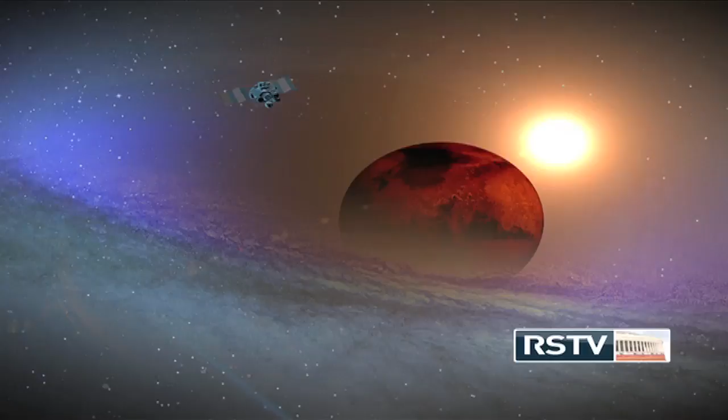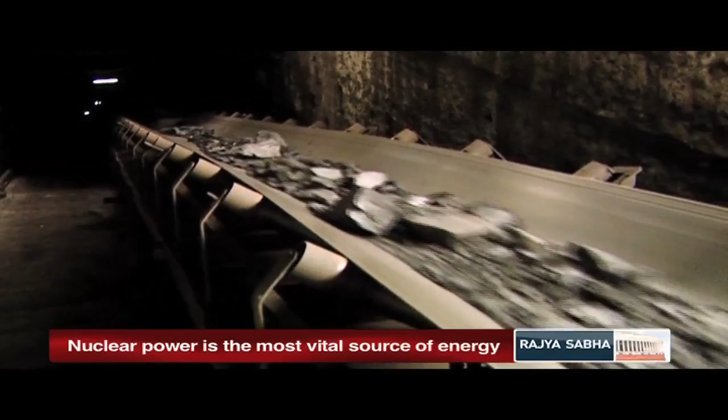In today's world, electricity is considered to be the life and blood of a nation's economy. Growing demand for energy resources is a crucial issue worldwide today, especially in developing nations like India. India is known to have a heterogeneous mix of energy resources that include both non-renewable resources like coal, petroleum and gas, and renewable resources like solar, wind and hydroelectric power.

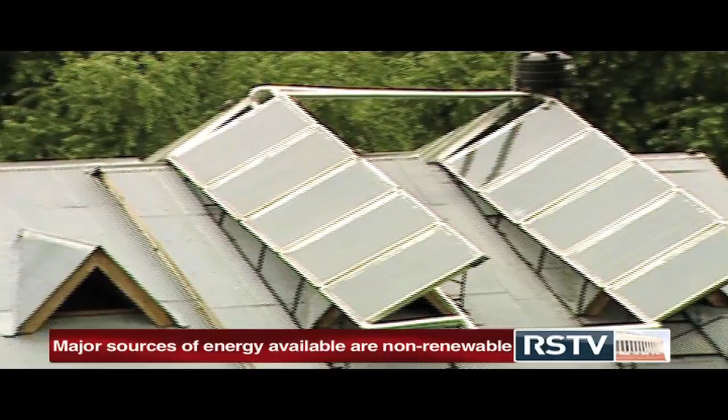Current studies suggest that we presently use an optimal mix of all the available energy resources to barely meet our needs. In the coming years, the energy requirement of India is expected to reach about 800 gigawatt by 2032 and 1300 gigawatt by 2050. It is obvious that there is an urgent need to explore novel methods of generating clean and safe energy. In this context, nuclear energy has been voted for as a highly viable option.

While coal continues to be the major electricity source in India, it is indeed a matter of great pride that about 2% of the electricity generated in India now is based on nuclear energy.

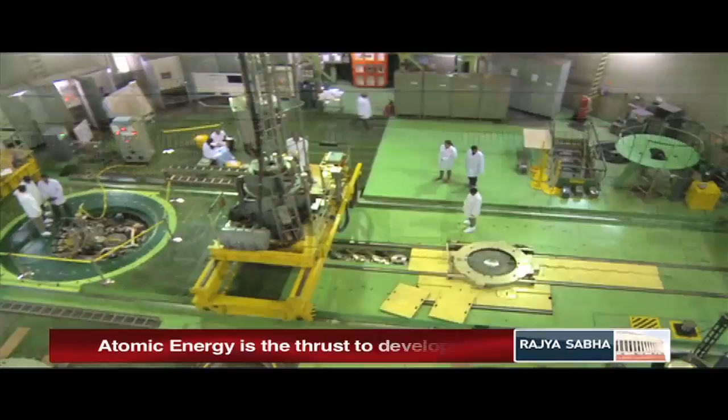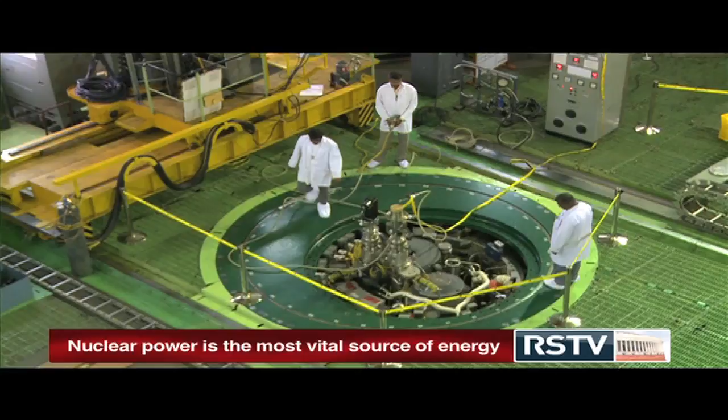India today is the owner of robust nuclear power technologies, engaging in R&D in various aspects of atomic energy and nuclear engineering, including exploration and mining of uranium, nuclear energy development and implementation, application of radioisotopes, etc. This growth has been achieved by the relentless efforts of numerous researchers under the guidance of visionary leaders.

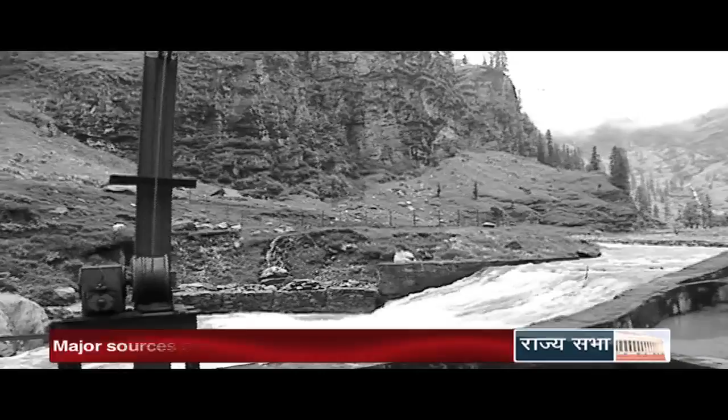The efforts to make our country self-reliant in energy production started right after the independence. While the oppressing British rule left the country in shambles, the increasing population and rising industries demanded more power. Initially, coal and hydro were considered as the primary energy sources. Fossil fuels like coal are limited and hydro capacity was bound. Hence, the country was looking for an energy resource that would ensure that we would be self-reliant in energy for centuries to come.

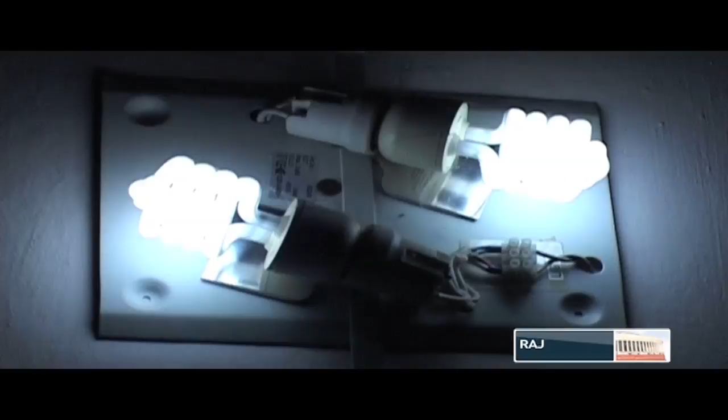60 years ago, nuclear technology was a futuristic technology. No one in the world had yet constructed or operated a commercial nuclear power plant.

Today, we have a realization in the country at all levels that nuclear energy is a very important component of the energy mix that we need for the country, because there is a pressure on fossil fuels. We know that they cannot be there for too long a time. There is a question of cost of the fossil fuel. There is a question of environmental issues connected with fossil fuel use, like carbon dioxide released to the environment, etc. So, looking at all this, the country knows that nuclear energy is very important.

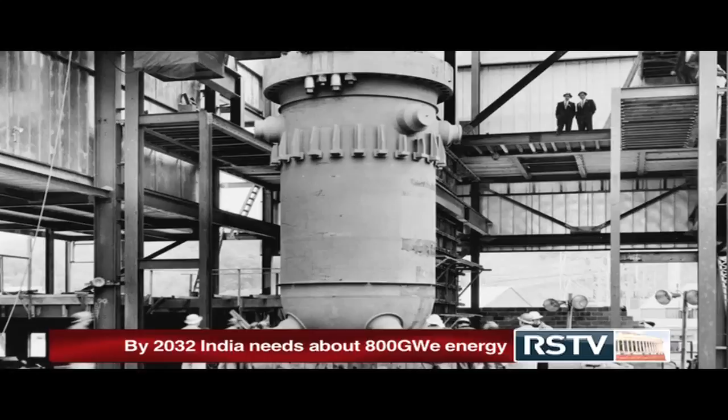The first ever commercial nuclear power plant was set up by the Soviet Union and became operational only on June 27, 1954. It produced just 5 megawatts of electric power. For a young nation eager to modernize and leap into the 21st century, nuclear power was one of the options. In this context, the setting up of the Atomic Energy Commission in 1948, followed by the establishment of the Department of Atomic Energy in 1954 to implement the policies framed by the Atomic Energy Commission, are important historical milestones.

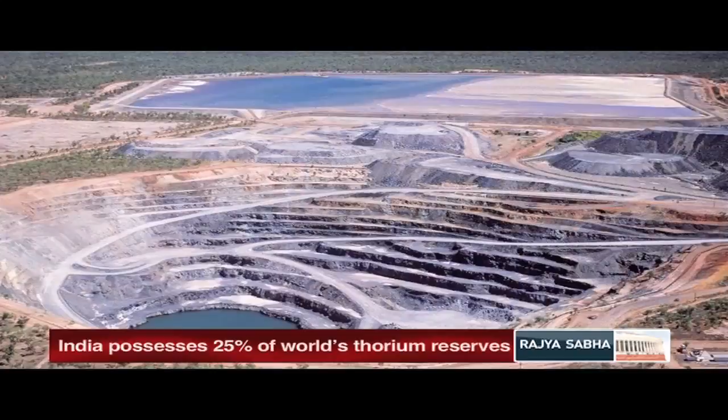While India was striving to emerge as a nuclear power nation, there was a catch. Uranium was not widely available in India. It was at this juncture that Homi Jahangir Bhabha, the first Secretary of the Department of Atomic Energy, made a visionary proposal. He saw potential where no one else saw worth. The monazite sand present in the beaches of Kerala and southern Tamil Nadu is naturally rich in the rare element thorium. India has very little uranium reserves but possesses around 25% of global thorium reserves.

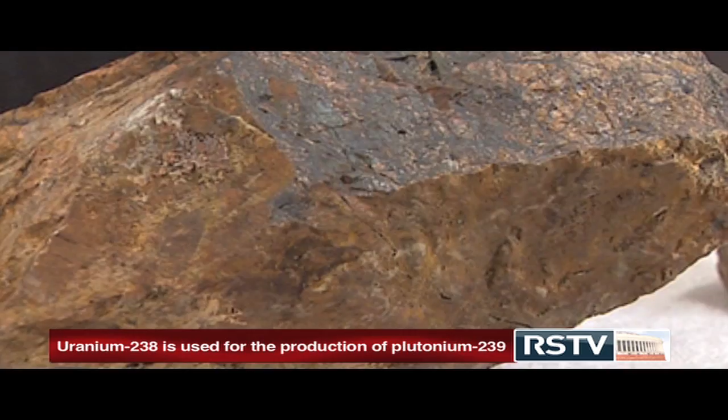Thorium in those days had no use, but Bhabha realized if only the mildly radioactive thorium could be made into a nuclear fuel, an energy source would be found ensuring energy security. Naturally occurring thorium itself is not a fissile material, but can be converted into its fissile isotope of uranium, namely uranium-233, through transmutation in a reactor fueled by other fissile materials.

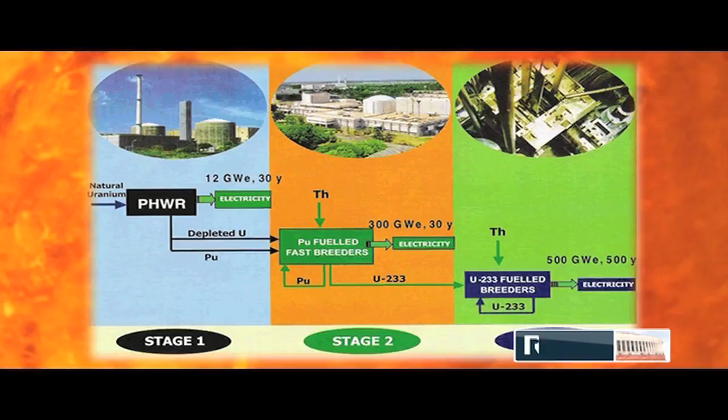Thus emerged the three-stage Indian nuclear program. This sequential three-stage program is based on a closed fuel cycle where the spent fuel of one stage is reprocessed to produce fuel for the next stage.

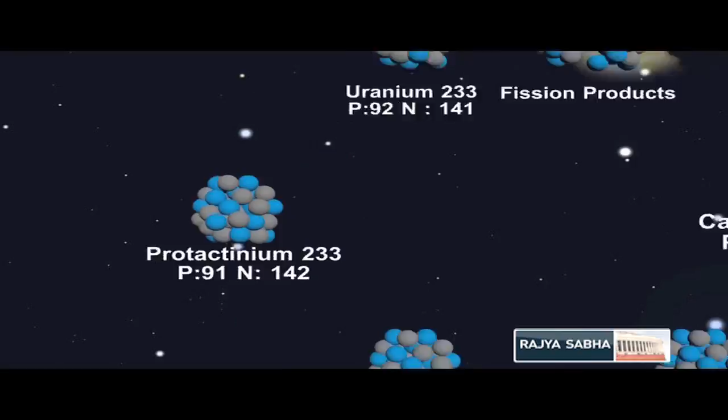Alpha particles cannot transmute thorium into U-233. Only neutrons can. We need plutonium for use in fast breeder reactors where the surplus neutrons can convert thorium to U-233. In the first stage of the Indian three-stage nuclear program, natural uranium is used as the fuel. The nuclear reactor produces plutonium as a byproduct. If we can harvest plutonium from the first stage reactors, it can be used as fuel in the second stage breeder reactors.

Plutonium produced in nuclear reactors is a mixture of various isotopes including Pu-239. It also contains Pu-240 and smaller quantities of Pu-241, Pu-242 and Pu-238. Thus, we should not give the impression that Pu-239 is being separated.

In what is called a thermal reactor, which is basically a moderated reactor, moderated with either water or heavy water, the neutrons which are released out of fission have very high energy and they are immediately slowed down by the moderator. That is required to increase the probability of fission in the next chain.

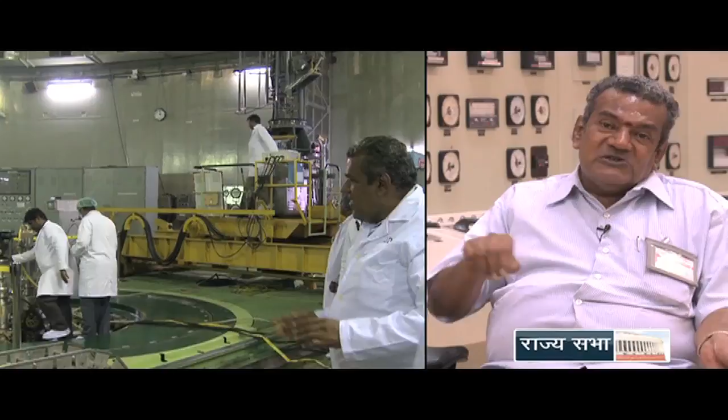Whereas, in a fast reactor, the neutrons are not moderated. The neutrons are specifically maintained with higher energy, but the probability of fission comes down. So, the reactor core will be enriched in fissile material. And the advantage of fast neutrons is that such a reactor is capable of producing more fissile material than it consumes. That is why the term fast breeder. Breeding is a process in which we generate more fuel than what we consume.

For instance, if I load 1 kilogram of fuel in a fast reactor, at the end of what is called a doubling time, the 1 kilogram of fuel would have burnt, but it would have generated 2 kilograms of fuel. The extra 1 kilogram can be used for building another reactor. So, that is called breeding.

The advantage, or I will say the necessity for breeding, is like this. Natural uranium contains only 0.7% of what is called uranium-235. It means that if I take 1 ton of natural uranium, only around 7 kilograms of fuel is burnt in a thermal reactor. The remaining 993 kilograms is uranium-238, which is not burnt.

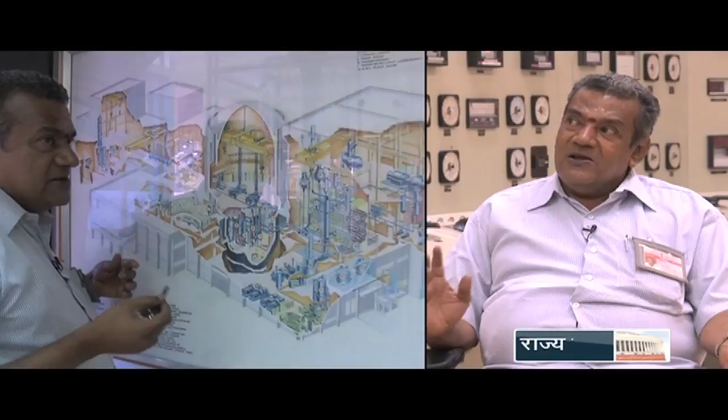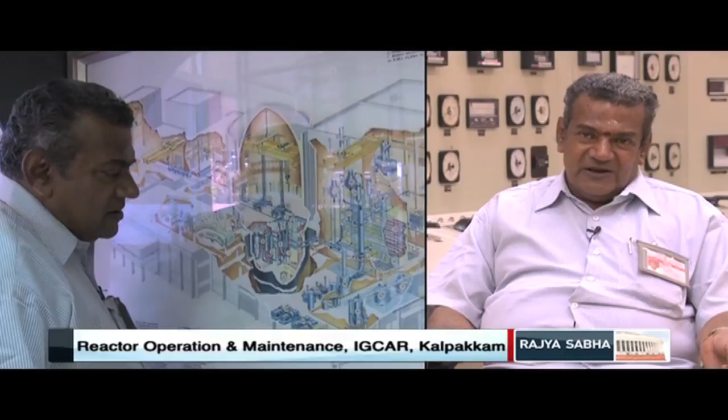So, by putting this U-238 with some plutonium and burning it in a fast reactor, I am able to convert this U-238 slowly into plutonium and will be able to completely burn away the uranium-238. So, it is a very efficient way of using the natural uranium reserves of the country.

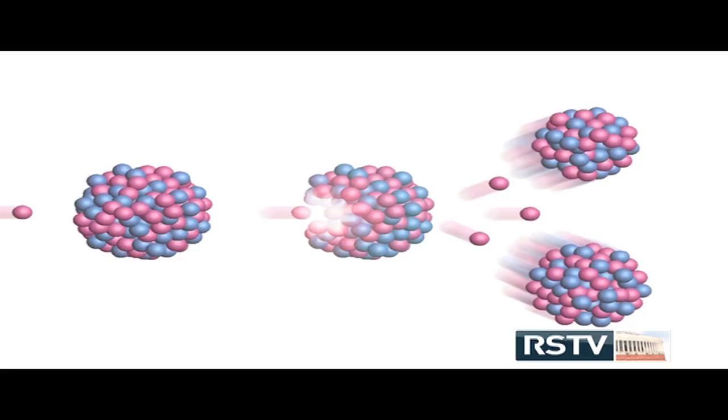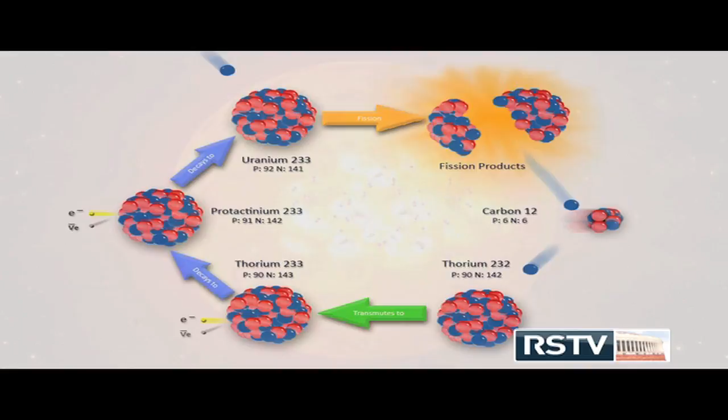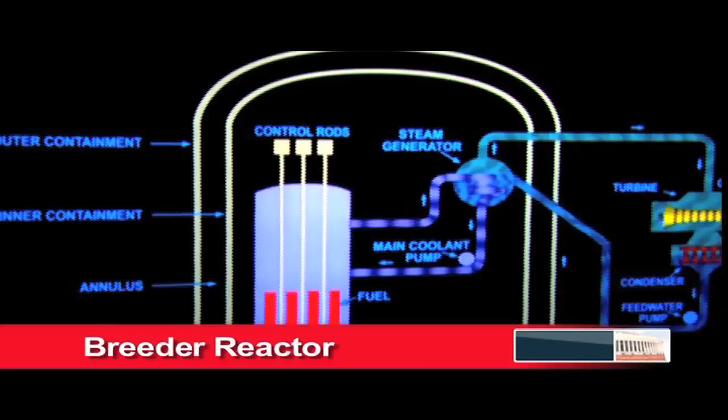The second stage of the Indian nuclear program consists of fast breeder reactors. In these reactors, the fuel contains plutonium. Thorium can be used in the blanket which surrounds the core. The fission reaction in fast breeder reactors helps in the conversion or transmutation of thorium into uranium-233. Neutrons produced in fission are absorbed by thorium and thorium becomes fissile uranium-233. Thus, the fast reactor not only produces energy but also additional fuel. That is why it is called a breeder reactor.

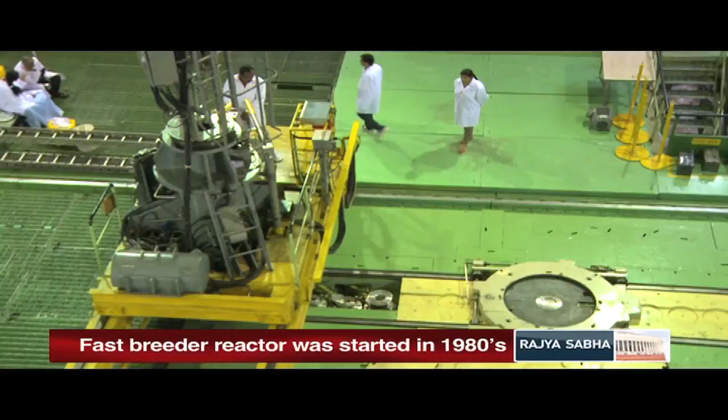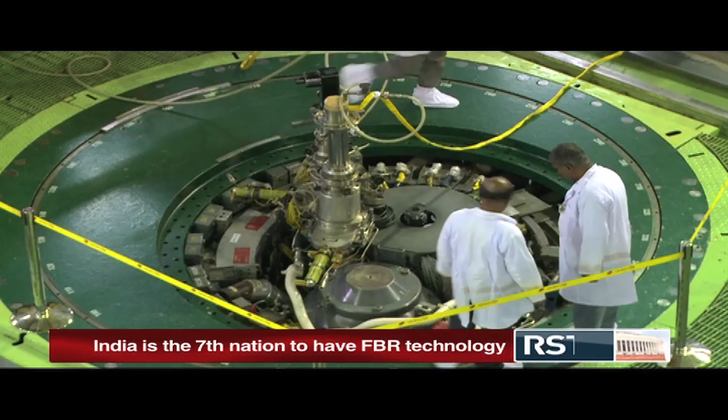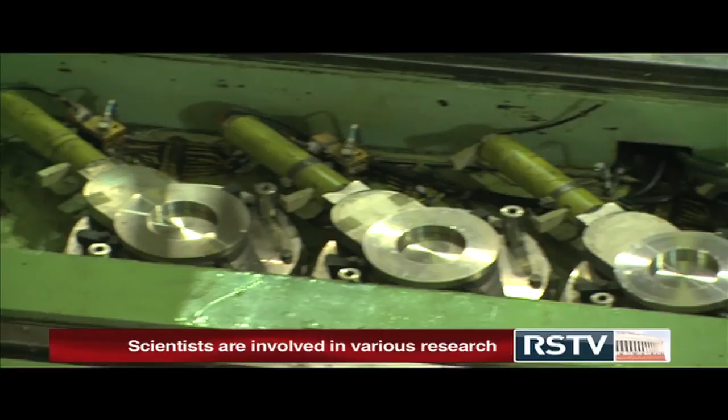It was way back in 1985 that a fast breeder test reactor was established at the Indira Gandhi Centre for Atomic Research facility at Kalpakkam near Chennai. The 40 megawatt thermal capacity test FBR was established to master all the dimensions of fast breeder reactor technology. The fast breeder test reactor FBTR uses an indigenous mix of 70% plutonium carbide and 30% uranium carbide as fuel. India was thus the 7th nation to have the technology to build and operate a breeder reactor after the United States, UK, France, Japan, Germany and Russia.

This reactor has used what we call a carbide fuel, which has not been used anywhere in the world as a driver fuel for a reactor. It has been tested, but it has not been used as a driver fuel anywhere in the world. But with that kind of a fuel, we have had excellent performance. In fact, we have been able to extract a very high quantum of energy from the fuel. It is usually expressed in terms of what we call burn up. Burn up is nothing but how much energy you can extract from a given quantity of fuel.

With the fuel in FBTR, we have been able to reach a burn up level of 165,000 megawatt days per ton. This is supposed to be an exceedingly high figure. It shows a good level of performance, which means that we are able to design the fuel, we are able to fabricate it indigenously, and we are able to have safe operation. We have knowledge on all aspects of fast reactors today.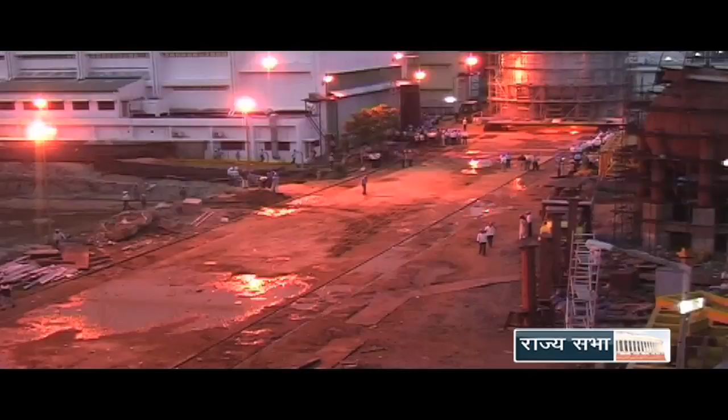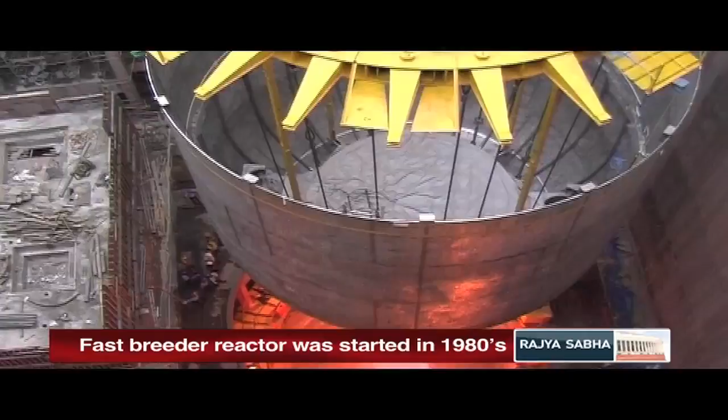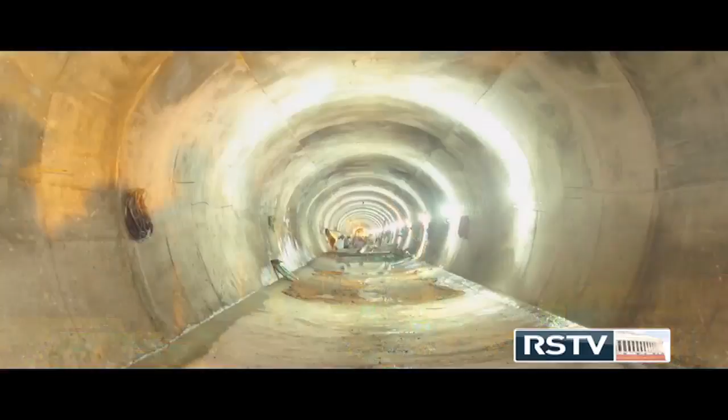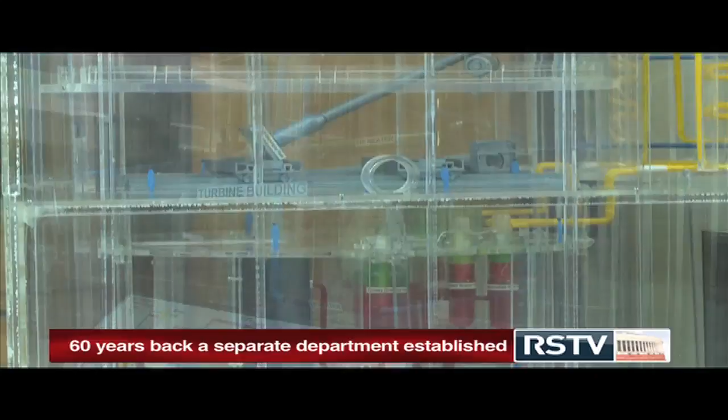Based on the lessons learnt and experience gained from construction and operation of FBTR, the Indian atomic energy scientists have gained confidence to launch the design and construction of a 500 megawatt prototype fast breeder reactor at Kalpakkam. The reactor at IGCAR is called FBTR and not Test Fast Breeder Reactor. The first commercial prototype fast breeder reactor with 500 megawatt electrical capacity is under construction in the premises of BHAVINI at Kalpakkam in Tamil Nadu. It will be functional by next year. The PFBR is designed to make use of MOX fuel, a mixture of plutonium dioxide and uranium dioxide, and is expected to have an operational life of 40 years.

As you know, we have been operating a fast breeder test reactor in Kalpakkam since 1985 or so. And that experience has given us a lot of confidence to design the new reactor, the prototype fast breeder reactor. Our industry has been groomed to develop special components and systems. And now we are almost completing the construction of the prototype fast breeder reactor. The nuclear fuel for it is already being supplied from Tarapur by our advanced fuel fabrication facility of BARC. I expect that sometime later this year, we will be getting into the criticality of this important reactor for us.

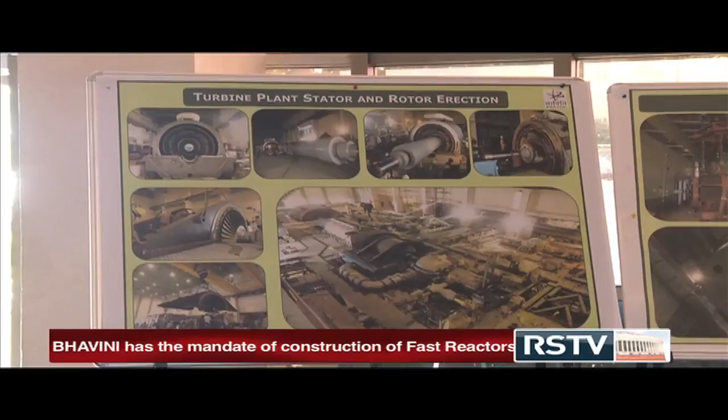The Bharatiya Nabhikiya Vidyut Nigam Limited, that is Bhavini, is a public sector undertaking that has been set up to construct and operate fast breeder reactors in the country, based on the fast breeder reactor technology developed by the scientists of the Indira Gandhi Center for Atomic Research.

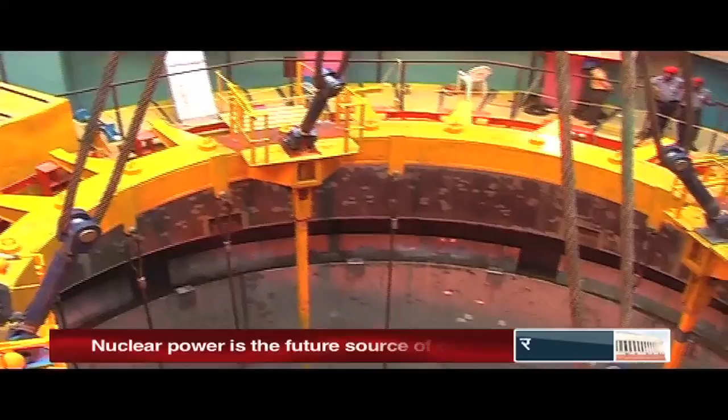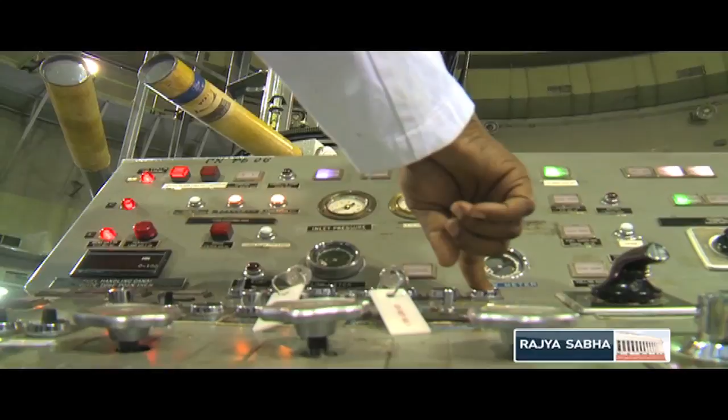About 98% of the components and materials used in this reactor have been developed indigenously by the Indian industry, researchers and the scientists. The completion and operation of this reactor will take the Indian nuclear program into higher orbit.

This reactor has not only a specialty that it has plutonium and sodium, it has the specialty of using materials which have not been experienced in the country in the past. Tolerances which have not at any time been achieved or tried. Dimensions very giant, very big. Handling, transportation, erection, tolerances and methods to be developed for the first time.

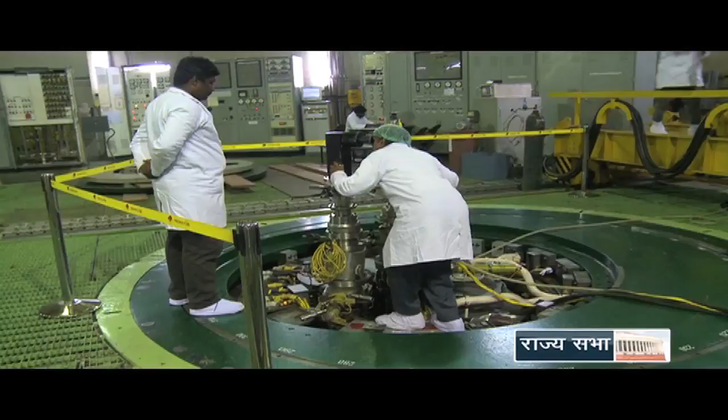For all practical purposes, all the knowledge which was there can only be partially used and everything has to be developed afresh for this technology. In the PFBR, uranium plutonium mixed oxide will be used as the fuel and the coolant shall be sodium.

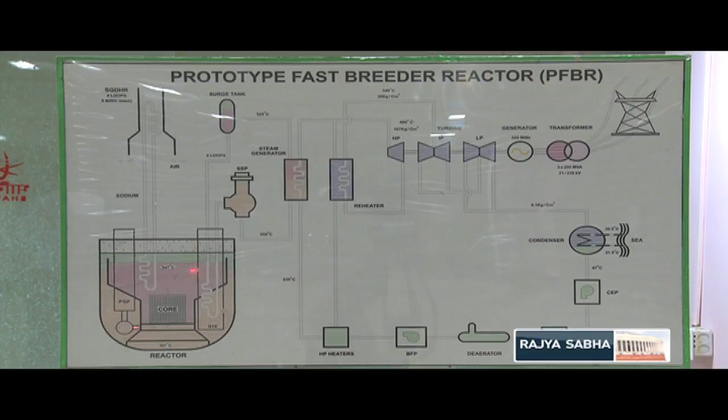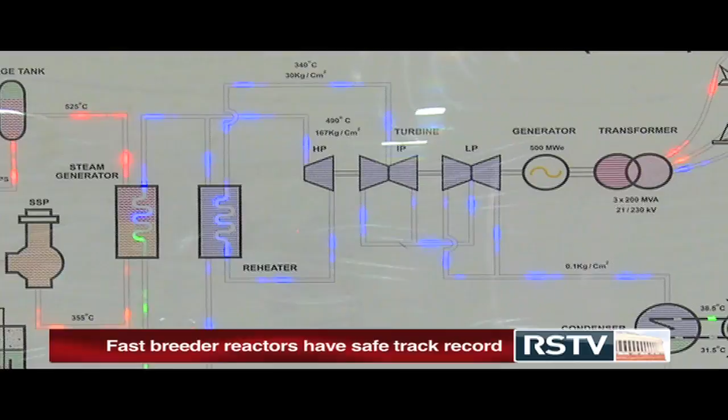The heat generated during the process of fission in the core of the power plant will be absorbed by the primary liquid sodium. The primary sodium will transfer the heat to the secondary sodium. The secondary sodium loop will be used to carry the heat to the steam generators. The steam produced in this manner will finally be used to turn the turbines and generate electricity. This steam can again be condensed with the help of the seawater and can be used again.

It is pertinent to note that in the fast breeder test reactor in operation for 30 years, there has been no reported abnormal radioactivity release or radioactive contamination during the reactor operation history. In this place, Bhavini, the company, has been formed to make fast reactors. They work on a different neutron spectrum as far as safety is concerned.

This is a very clean reactor. One of the cleanest reactors which are there, they are fast reactors. Radiation release is almost insignificant. Dose given to the operating and maintenance crew is almost nil. You can just walk through and you don't get any dose. You do major maintenance, you don't get any dose. This is an exceedingly clean reactor.

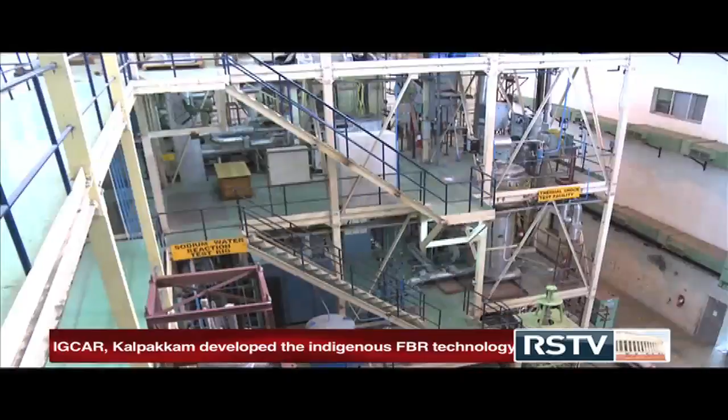Nevertheless, scientists do not want to take chances and are taking steps for ensuring strict safety standards. In this regard, various safety standards and measures have been designed to meet all possible kinds of emergencies. The advantages of nuclear energy so produced are going to be many. First and foremost, while nuclear energy is more powerful and efficient than other alternative energy sources, the production process does not emit any greenhouse gases and pollute the environment.

Unlike sources of energy like solar and wind, which require sun or wind to produce electricity, nuclear energy can be produced from nuclear power plants even in the case of rough weather conditions. They can produce power 24/7 and need to be shut down for refueling and maintenance purposes only.

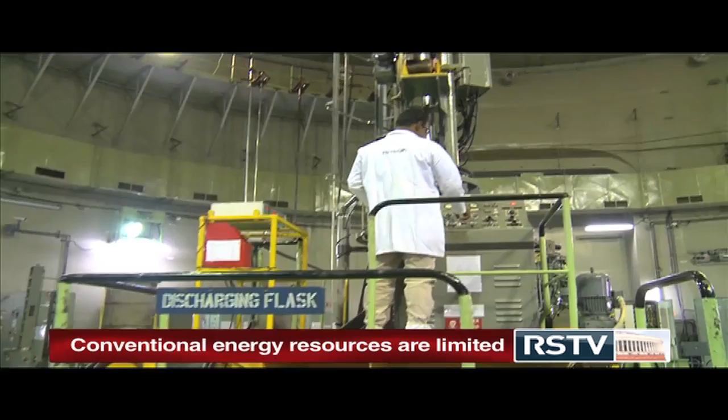Nuclear energy is also an affordable option. While the setting up cost of nuclear power plants is relatively high, the cost of fuel and running cost is very low. Also, small amounts of fuel can produce large amounts of energy. Hence, the transportation of the fuel is easier than fossil fuels. As a result, the overall cost of electricity production is low, making the electricity cheaper for the public.

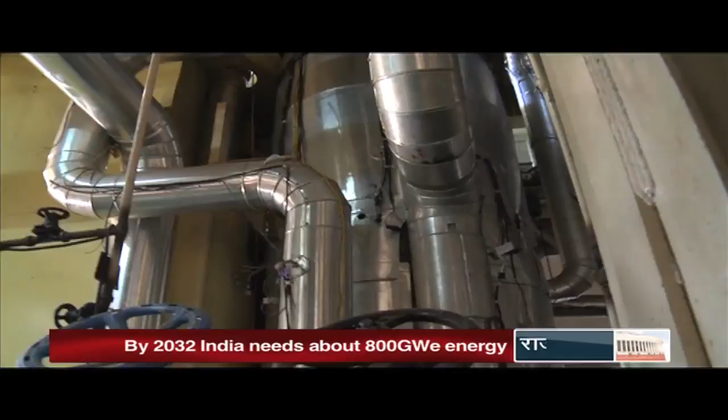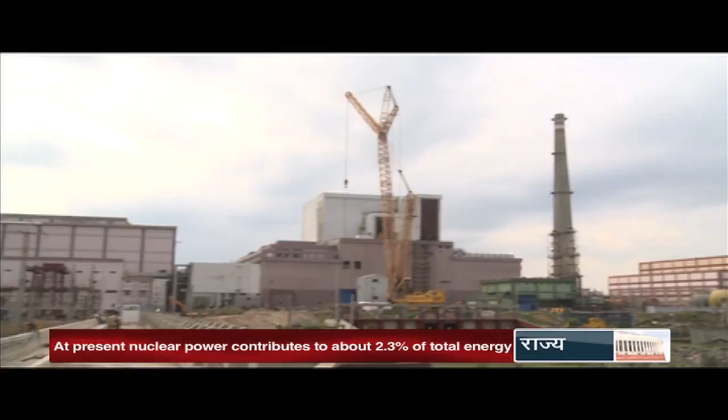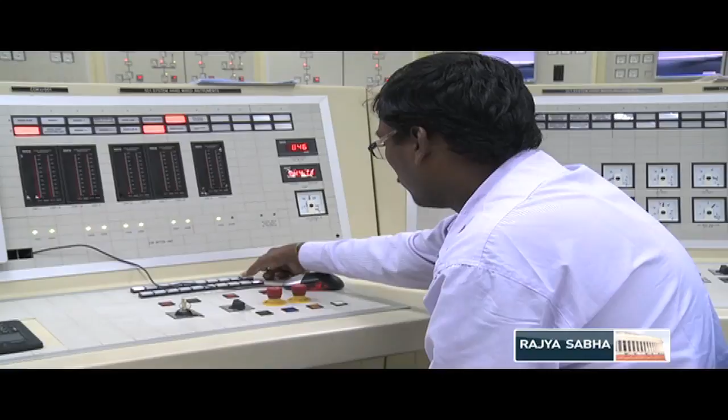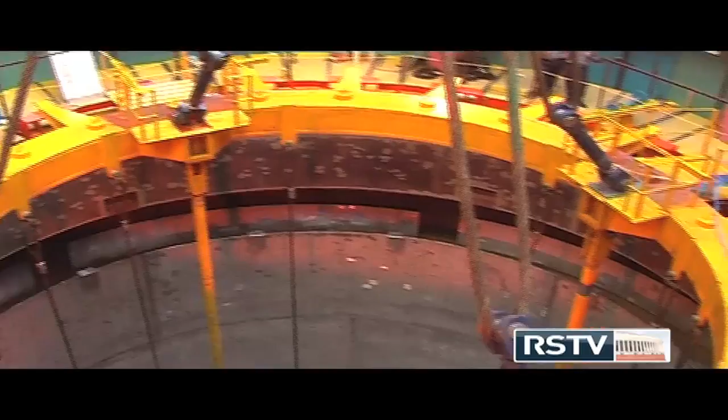While reserves of coal, oil and natural gas are limited and expected to vanish soon, nuclear resources are currently widely available and expected to last for several hundred years. Today, India leads the world in fast breeder technology. While Russia also has fast breeder reactors in operation, other countries are expected to exploit this technology only around 2025 and beyond.

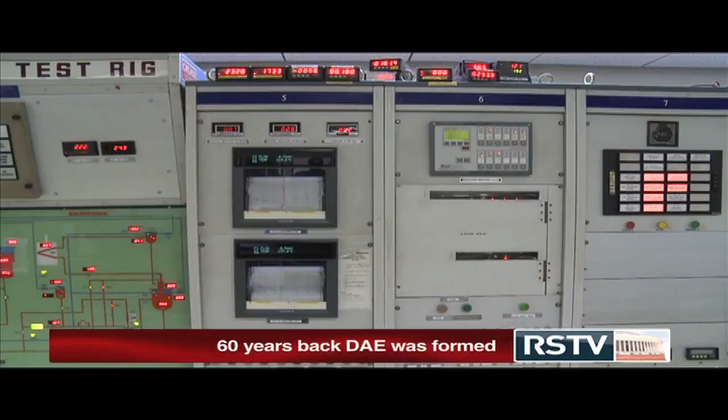India plans to complete 3 500 megawatt fast breeder reactors by the year 2020. With setting up of a fleet of fast reactors, the stage 2 of the nuclear program will attain maturity and help to produce enough U-233 from thorium to launch the stage 3 of the nuclear program. The 3-stage nuclear power program would contribute to self-sufficiency in energy and for energy security of India for centuries to come.

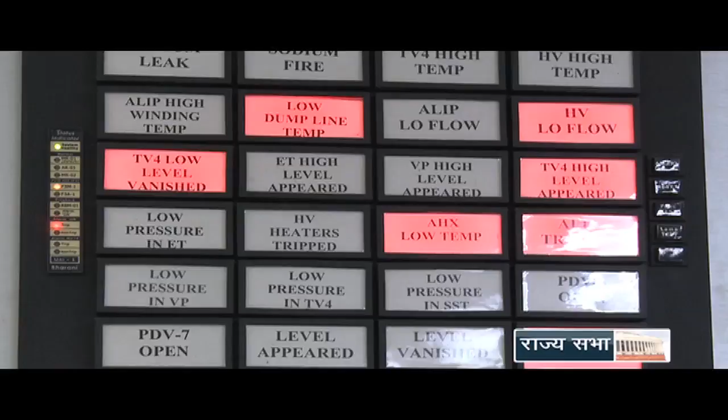And this reactor has come out so well, almost a temple of excellence, and is a demonstrator of the capabilities which Indian industries and Indian researchers and Indian youth have got.